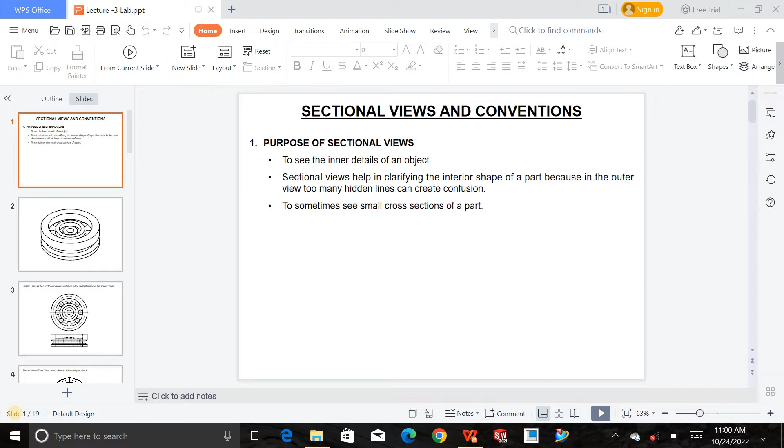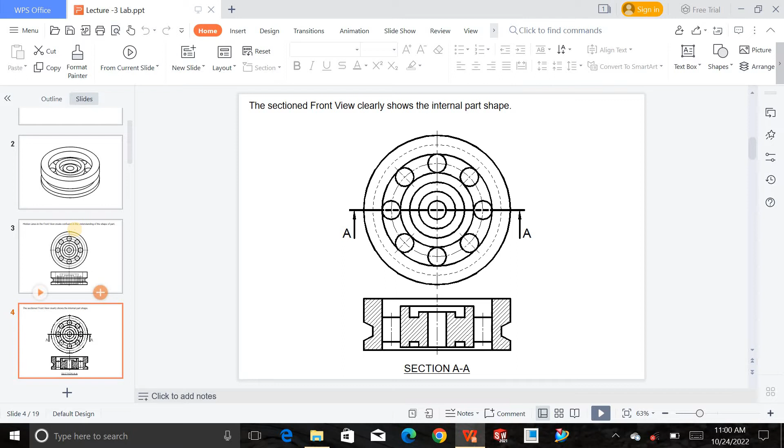As you can see, for this object we have the front view and the top view shown with certain hidden lines. So here we've made a section of this part, which we call Section AA. Looking from the side, we have the sections, and you can see the section lines here. Where you see the section lines, that's the cutout section, where we have cut out this object.

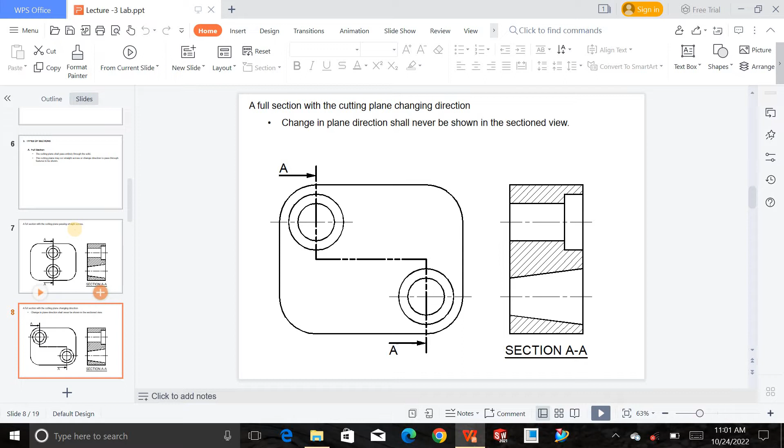So we have three ways to show section views. One is the full section, as you can see here, to look throughout the object entirely. This next one is also a full section because we have not missed out any of the section; we just break out throughout from one side to the next level, and we can still call this Section AA.

We can have the half section, just looking at half portion of any object. This is throughout, but on the left side here you can see we have shown just half the object and sectioned it.

Broken out section is used where the interior portion must be shown, but a full or half section cannot be used because the cutting plane would remove some feature that must be included. An irregular break line is used to limit the extent of the section. So we have this type of section too.

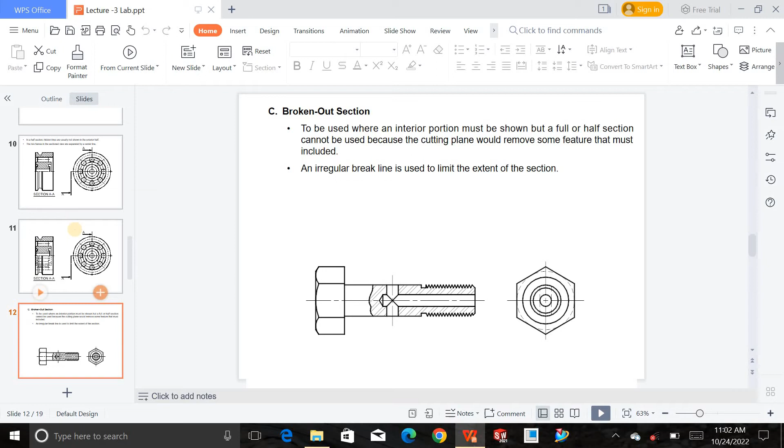Next we have the rotated section. If you rotate any view, you will look at the cross section of that object. Otherwise, if you didn't rotate the object at any angle, you will not see it.

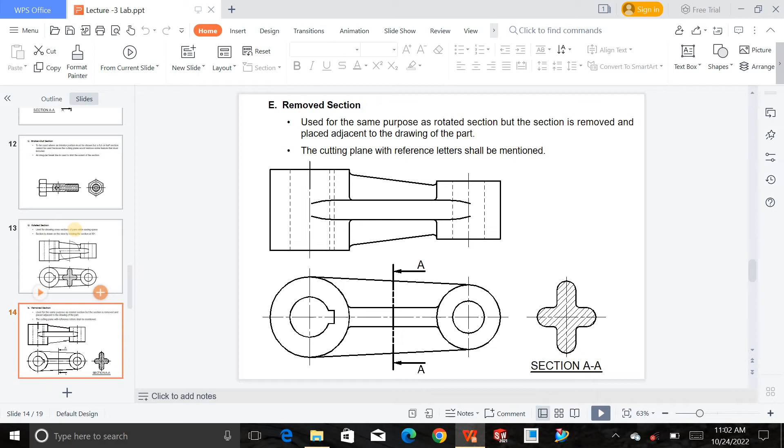We have the removed section. If you remove a certain section from any object and place it in a separate view, that's what we call the removed section.

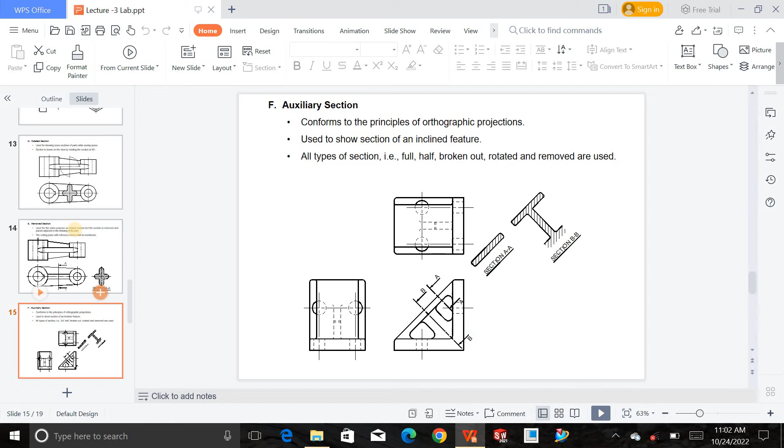Auxiliary sections: sometimes we have to make auxiliary views. For example, if we have certain inclined objects, looking at that object from the top, you will not see that it is inclined at a certain angle. For that we need auxiliary sections, and we must deal with these things whenever we're working with software and making them there. All this will become clear then.